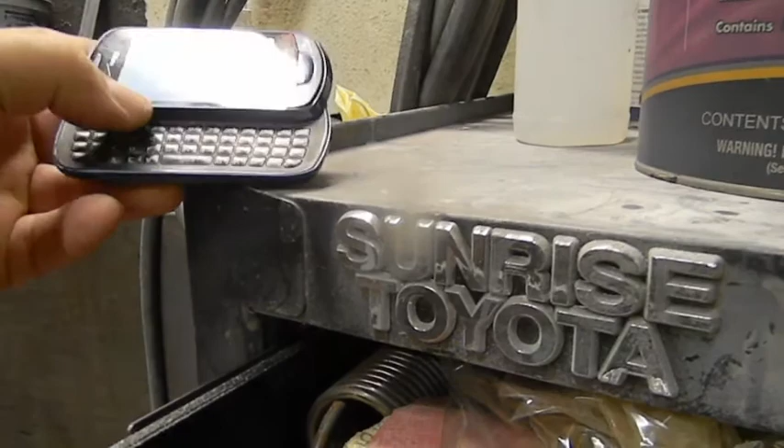4781-2 is what it is. Okay, but I'm reading it through the camera screen, and it's not even focused in.

There you go, now I can read it. 4781-2, basically that's a carburetor number. I got a friend working on a carburetor that he bought used, and it's wreaking all sorts of havoc. 4781 should be an 850.

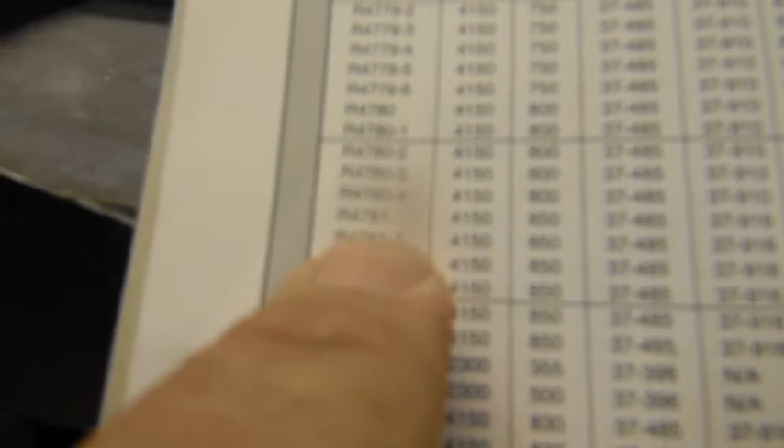Let's see if we can find the number. Did I say 4781? I don't even remember now. 4781, there it is, good. That's a good start, that we have information on it. We're 47. I hope it's focusing. I should have grabbed the other camera, I apologize.

But 4781, 4781-1-2. It's a double pumper. It's an 850.

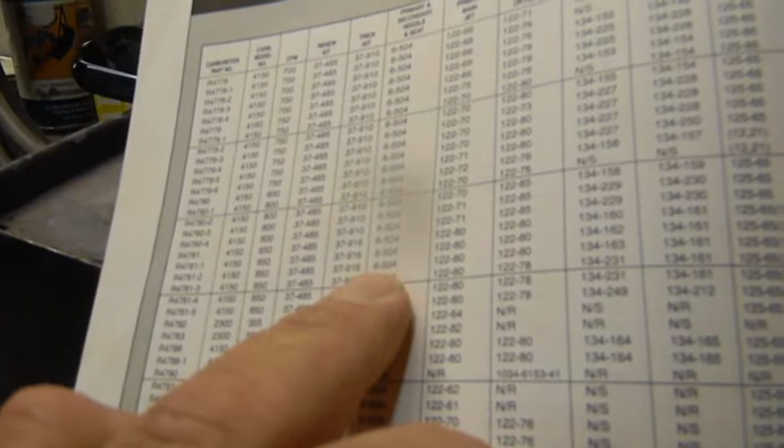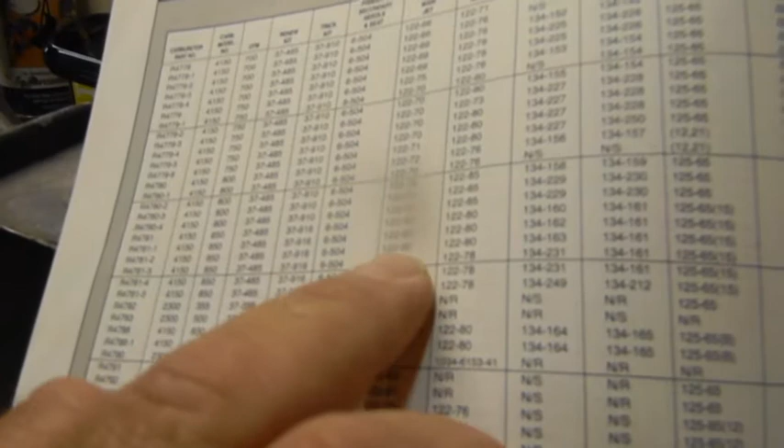Okay, primary needle and seat. There's your trick kit, your renew kit. Primary main jet, it has 80s in the front and 80s in the back. That's where the problem started.

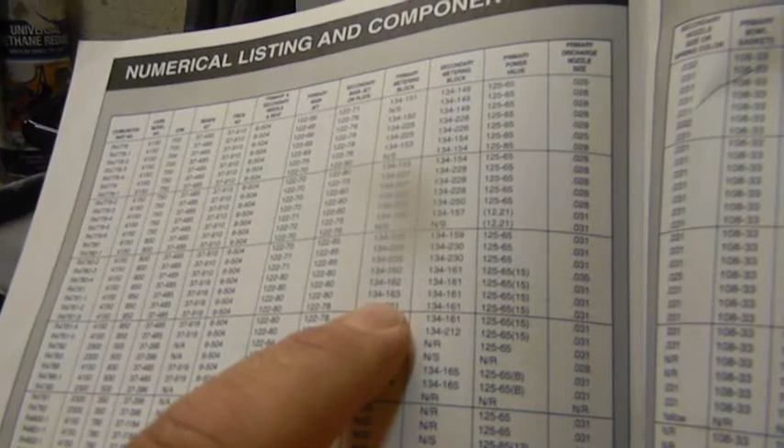Okay, metering block. That I want to confirm. I don't know if these metering blocks, yep, and the discharge nozzles are wrong. Everything's wrong on this carburetor. Holy Christmas.

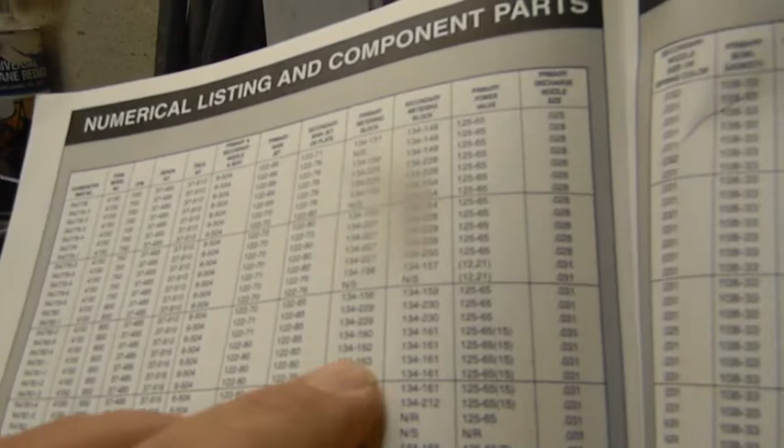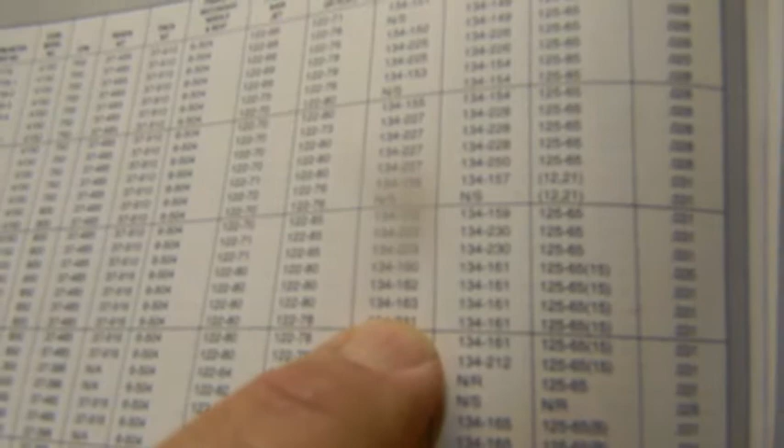Okay, I'll explain in a second, but I gotta write these numbers down. You see the dash 1, 2, and 3. Here's the dash 1. Can you guys read the number? I'm sure you can, I'm trying to keep it out of the blurry spot. Dash 2, dash 3, dash 4 uses the same one.

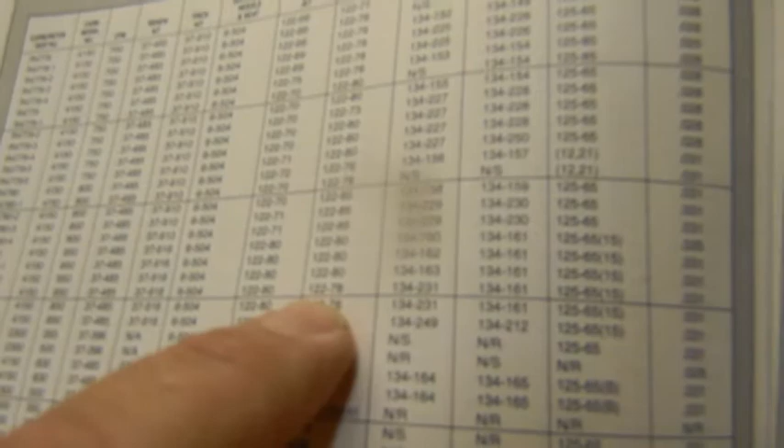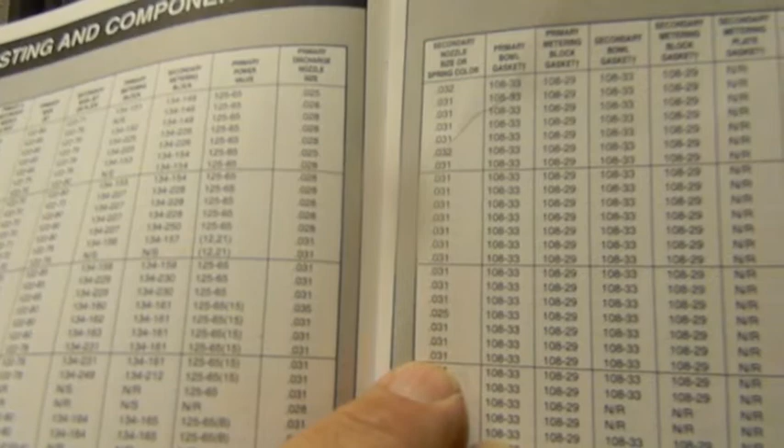Okay, but if you notice, as soon as you get to a dash 3, it's 80s in the front, 78s in the rear. Primary squirter, 31. He's got 28 in there. It's up 2. Okay, gasket.

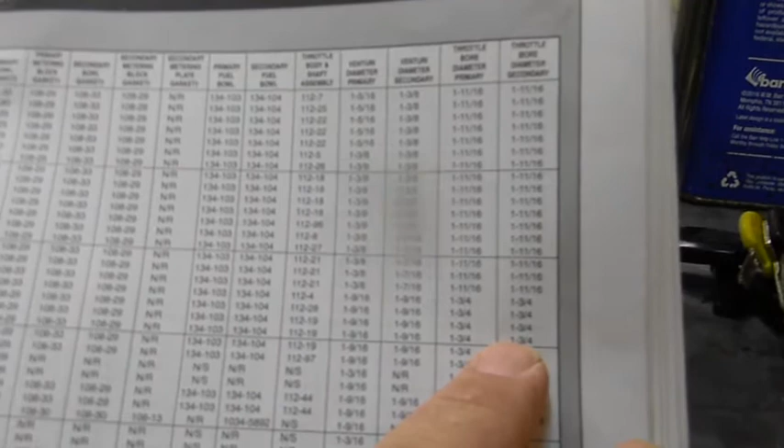Fuel bowl, throttle body and shaft. So it's a 1 9/16, 1 9/16, 1 3/4, 1 3/4. Okay, so now the question is going to be, how much does it flow?

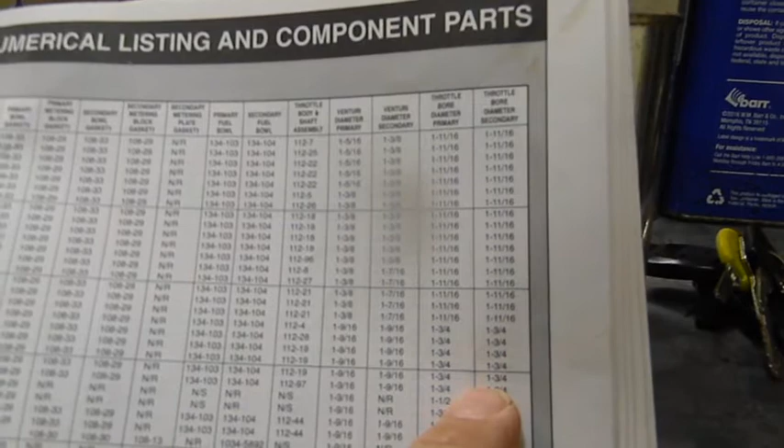Okay, the carburetor I had before was an 850, but it flowed 950. Yeah, we see 800 right above it. It's much smaller, I got a feeling this flows 950. I'm going to have to look that up and confirm.

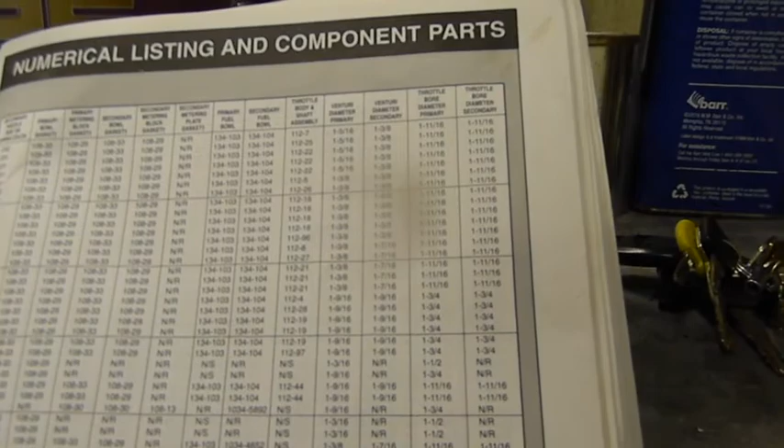But right off the bat, well, let me confirm, see what he's got first, and then we'll talk about this. Maybe we'll all learn something together.

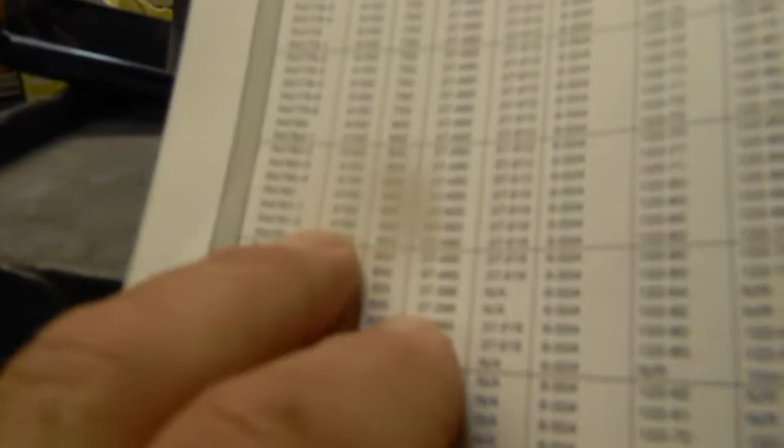Okay, let's go through this real quick. I'll tell you what we got, I'll tell you what some of our problems are. Okay, he has the... what did we say he had? I forgot already. He has the 4781-2, 4150, 850. It's a 950. Okay, flows 950. There's one of the backwards carburetors.

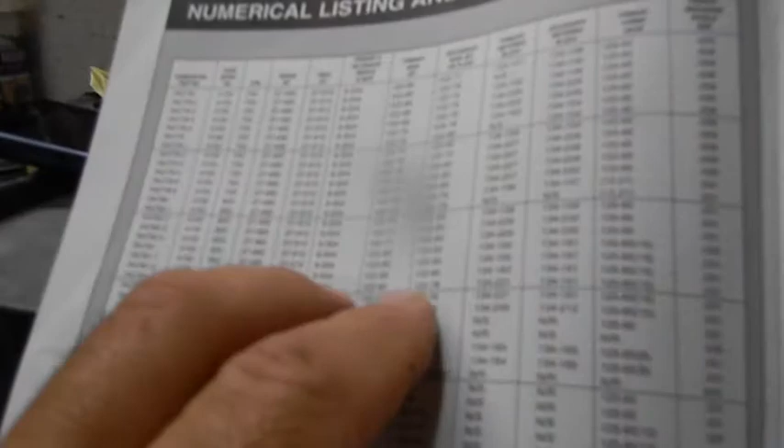Okay, let's get past all this. The primary jets, they're looking for an 80. The secondary jets, they're looking for an 80. He has 81s in the front and 90s in the rear.

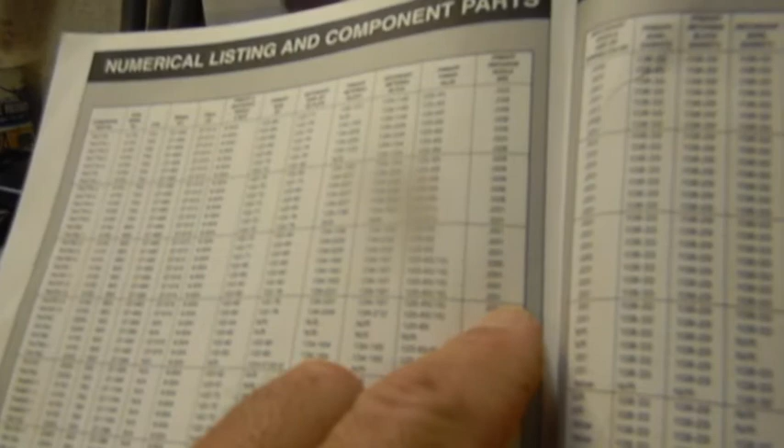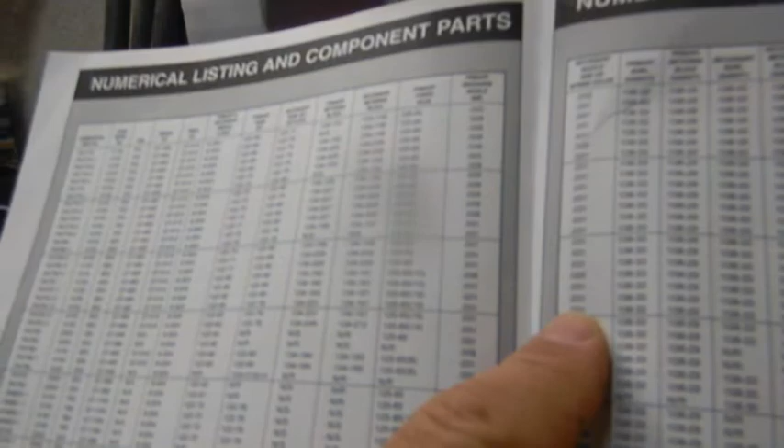Okay, for the primary discharge nozzle, the squirters, they want the 31 thousandths in the front and the 31 thousandths in the back. He's got double 28s. He has a 30cc accelerator pump in the front and a 50 in the back, which is the way I've looked it up.

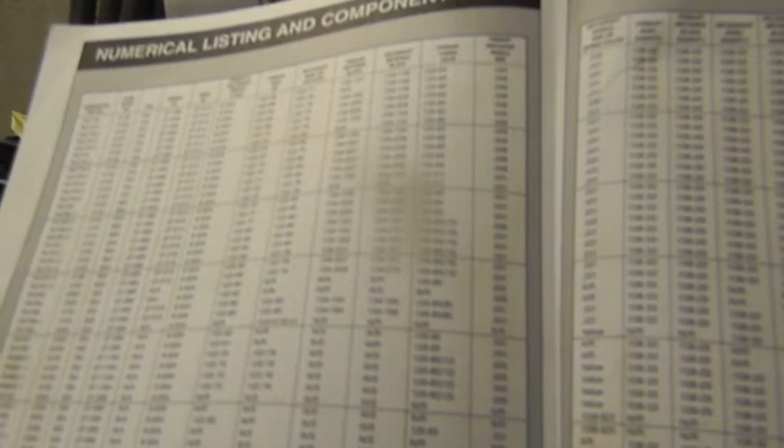It's only a 2-corner idle circuit, which I've also found on these, so there's nothing wrong there.

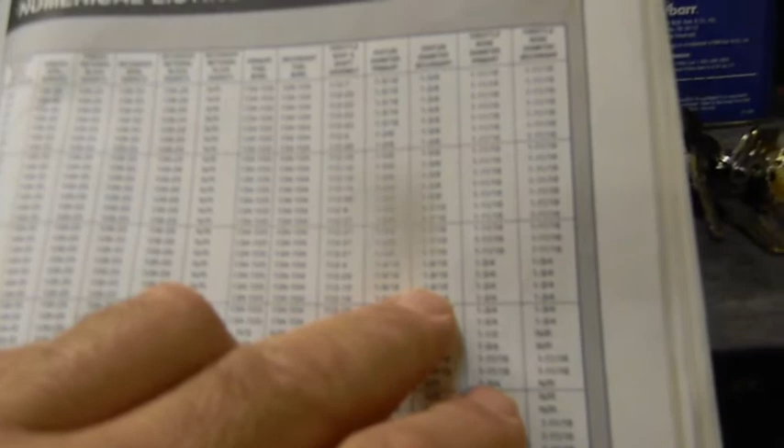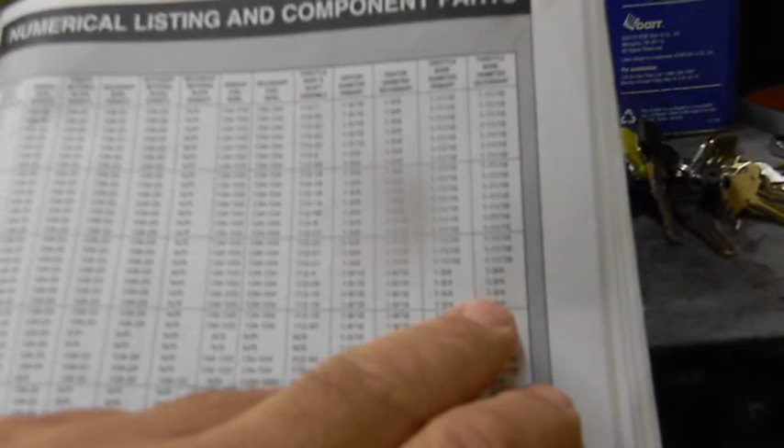1 9/16, 1 9/16, it's like a square carburetor. 1 3/4, 1 3/4. The 950s, these are 1.5, 1.5, 1 11/16, 1 11/16, clearly backwards. That's what people talk about. So the original 850s that you bought flowed 950.

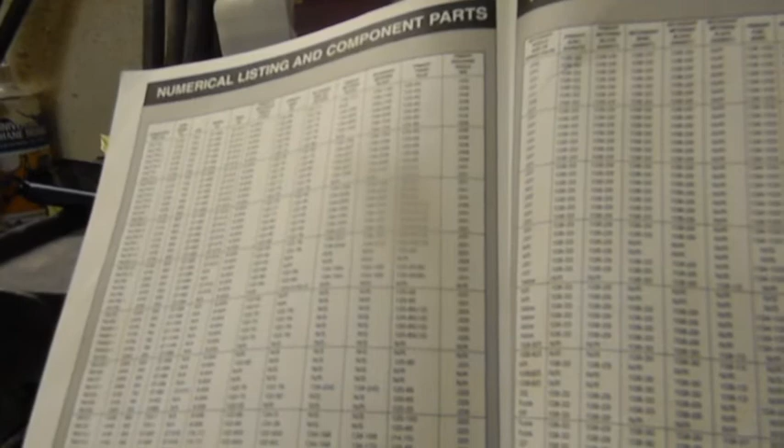The original 950s flowed 850, so it's a 950 CFM carburetor. Now here's the problem, he bought it used. It's definitely an old school carburetor, it's got flathead screws on the bowls.

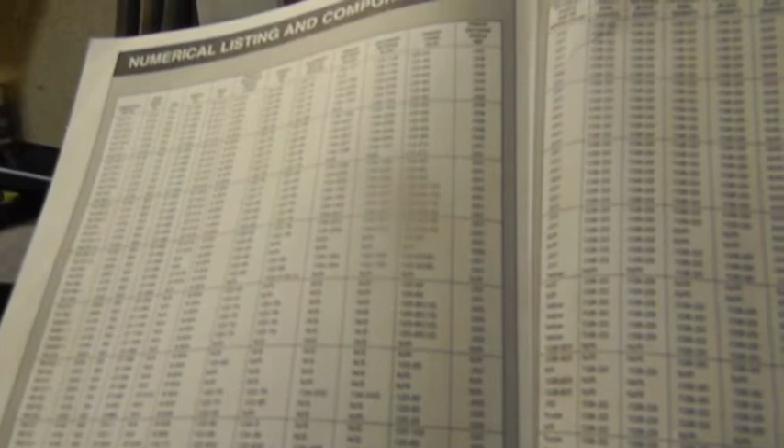Bought it from, I don't know if he knew the guy. I don't think he knew the guy. It didn't sound like it. And it's on a boat. And on a boat, you're not always idle and nailed.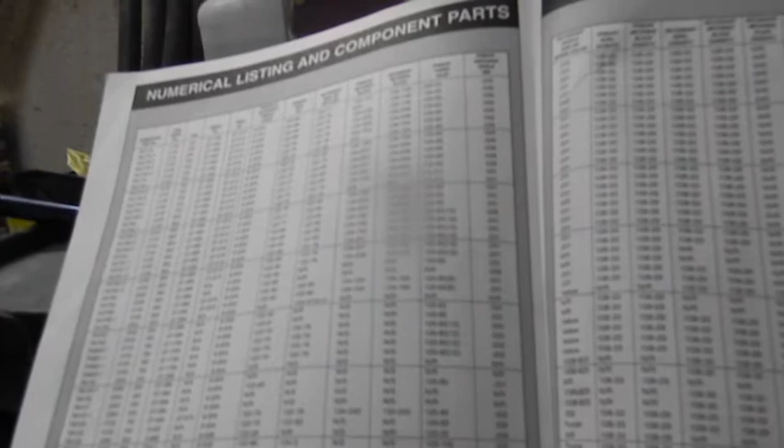So he brought the carburetor in today because he's having drivability problems. Off idle is fine. When you give it a little bit more and the secondary starts to open, it actually bogs down. When you pull back on the throttle, the RPMs increase. When you give it more, you know what I mean? When you ease into it, the RPMs actually go down.

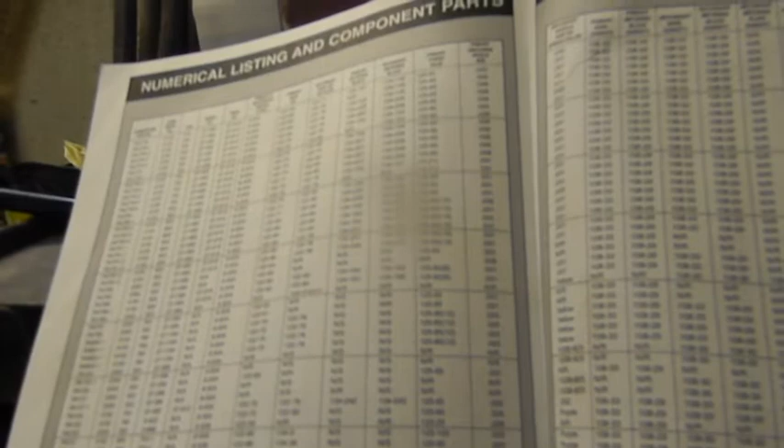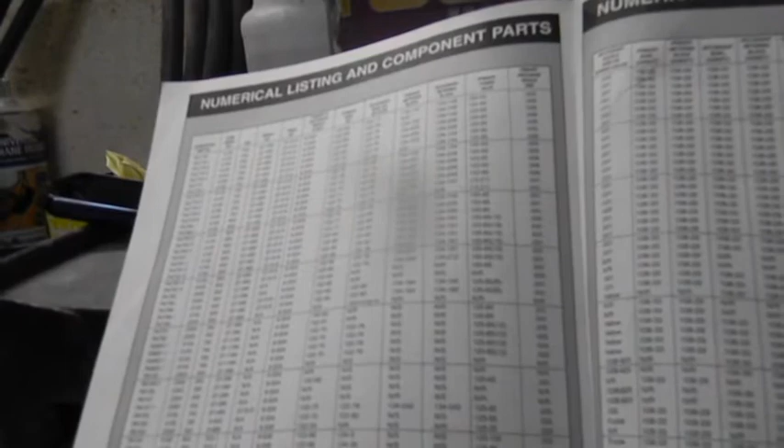Okay, wide open throttle, he's had the thing at, I think at this point, 91 miles an hour. So the boat's a screamer. Okay, it's a big block.

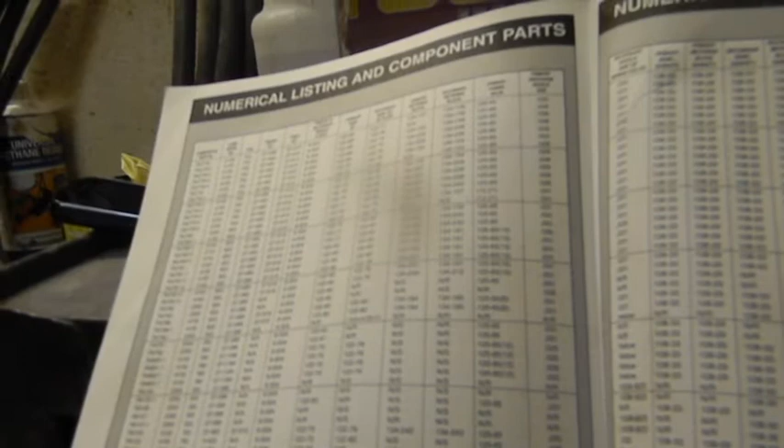But here's the deal, he brought the carburetor in, I popped it open. I didn't know what jet size belonged in there, but I knew they weren't right. I mean, 90s, you can almost stick your finger through a 90.

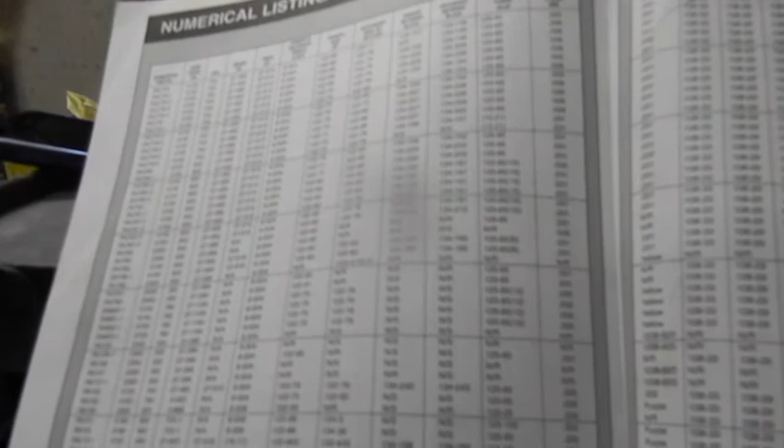But I noticed right away that on the secondary side, they blocked off the power valve. That's why it's 90s instead of 80s, you block off the power valve and you go up between 8 and 10 sizes to compensate. And the primary power valve was a 3.5 instead of a 6.5, which means...

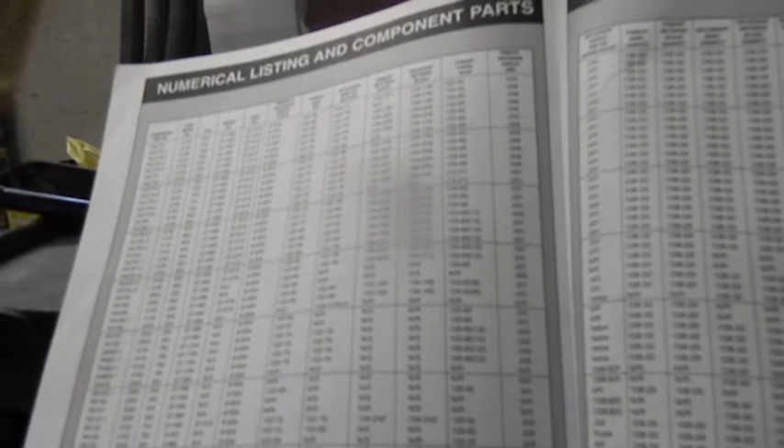Normally when you're accelerating, the engine vacuum goes down, obviously. When you get below 6.5 inches of vacuum in your engine, the power valve starts to open to enrich it. So you're using your main jets and the power valve, and obviously from there down it stays open. When you put a 3.5 in there instead of it coming open at 6.5, you've got to wait more and more and more.

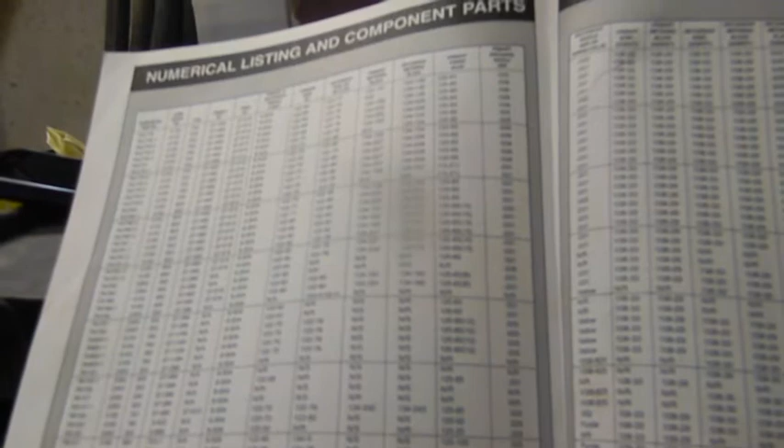Now, some of the things that people did, there are benefits to it, but for his application, it's actually counterproductive, or counteracting what he really needs done. That's for all-out drag racing.

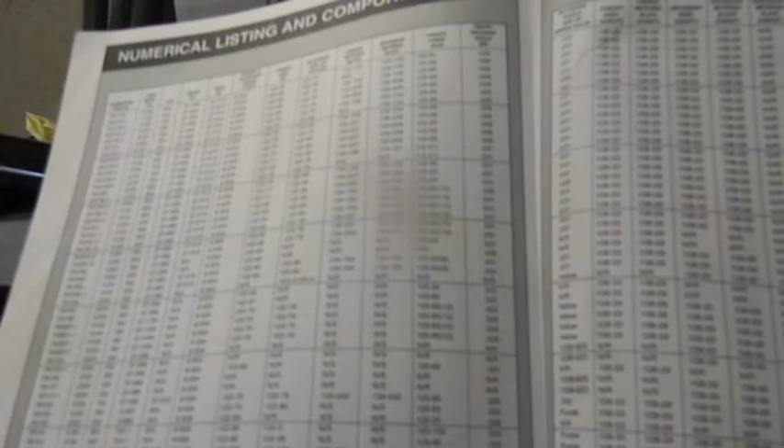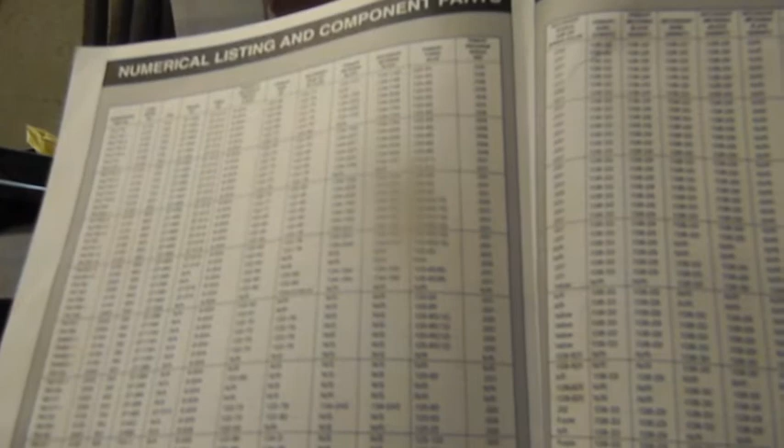By taking out the rear power valve and putting the jets in there, in drag racing, you go from pretty much idle, or you bring it up into a stall, and then you go. And by doing it the way they're doing it, it actually bypasses one of the circuits of the carburetor, and you're just flowing fuel through. But you lose anything in between.

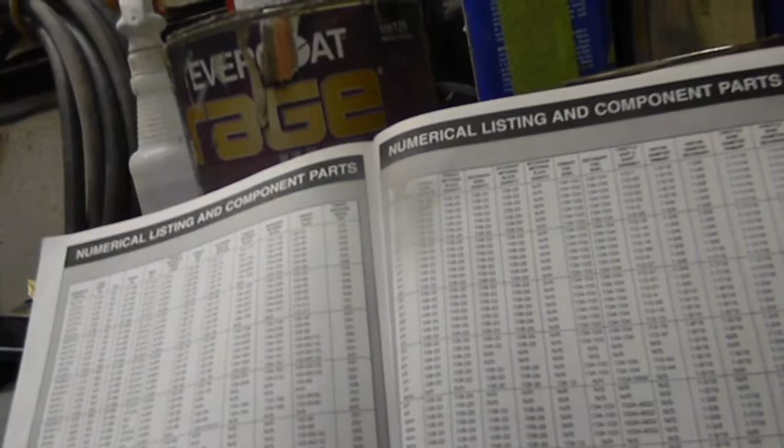Anything in between is too rich. So as you're giving it more gas, and the secondary starts to open, instead of the fuel coming through the jet—a number 80, which isn't 80 thousandths, but a number 80—and then you give it more and more fuel, or more and more load, then all of a sudden it drops below 6.5 and you get the additional.

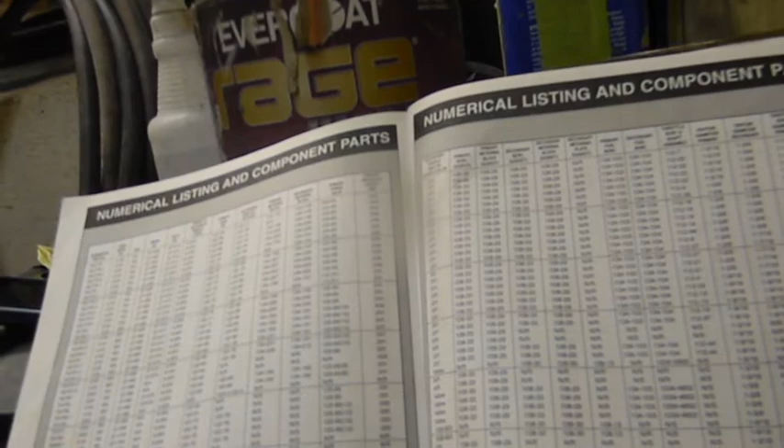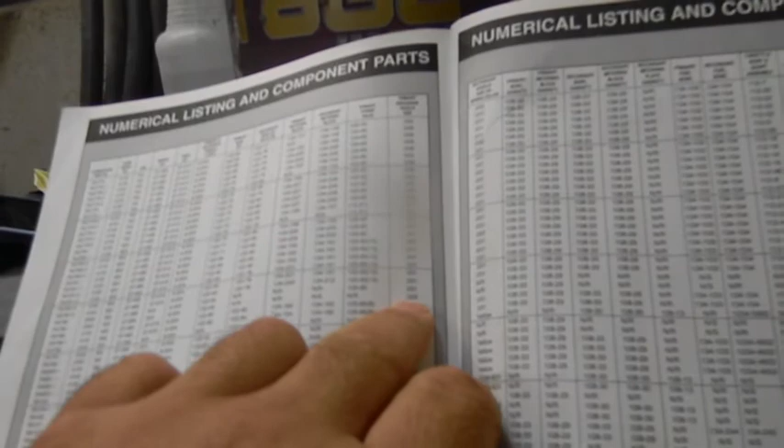As soon as the secondary is open, it's coming through a 90. So it's like, as soon as the secondary is open, it's like having a ruptured power valve and it's wide open. So you're putting too much fuel into the engine. Plus he's fighting some acceleration problems.

I said to him, let's put the carburetor back to the way it came. And he looked up online real quick to see what the jets were supposed to be, which was 80/80, which is what my book confirms.

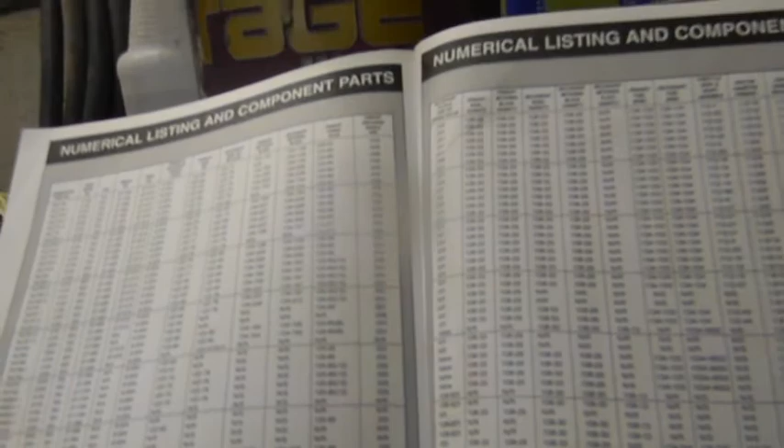But he couldn't find anything on the squirters or any of the other problems, and I didn't know if the metering blocks were changed. Now I have numbers to compare them to.

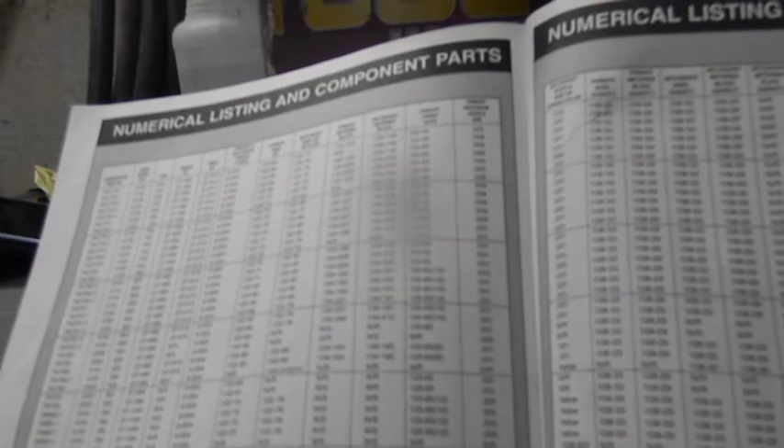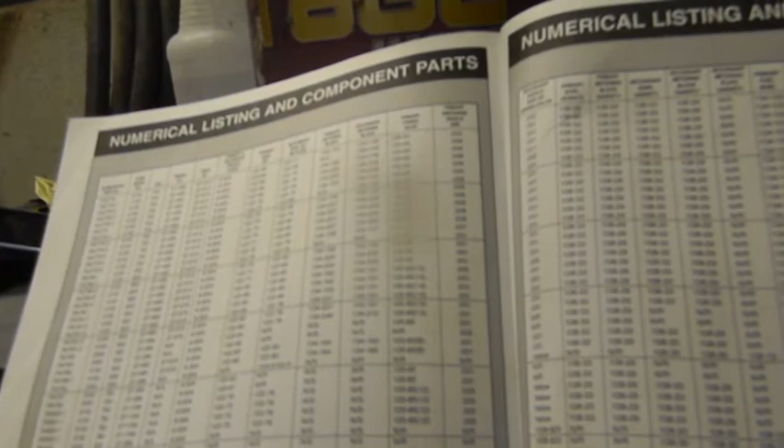So basically what's going to happen is he's going to throw 80s in the front, 80s in the rear, and he's putting two 6.5 power valves in there. And we talked about adjusting the rear blades.

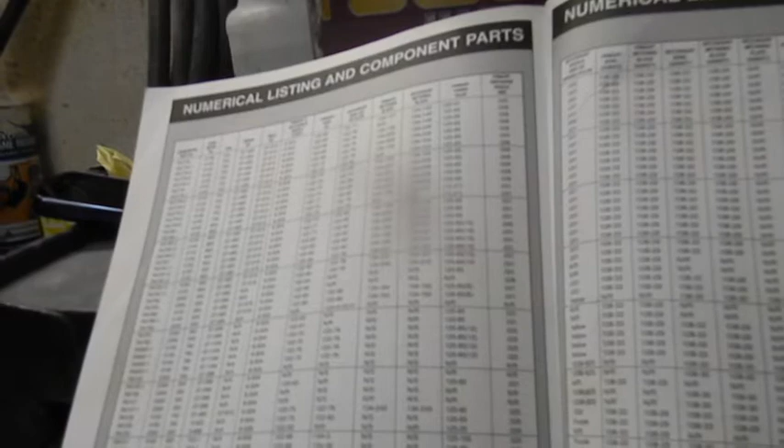Instead of putting everything into the primary circuit—because you've got the primary blade so far open that you're no longer in the idle circuit, you're in a transition slot, so the mixture screws are useless. Obviously the motor isn't stock when you're hitting those type of speeds in a boat.

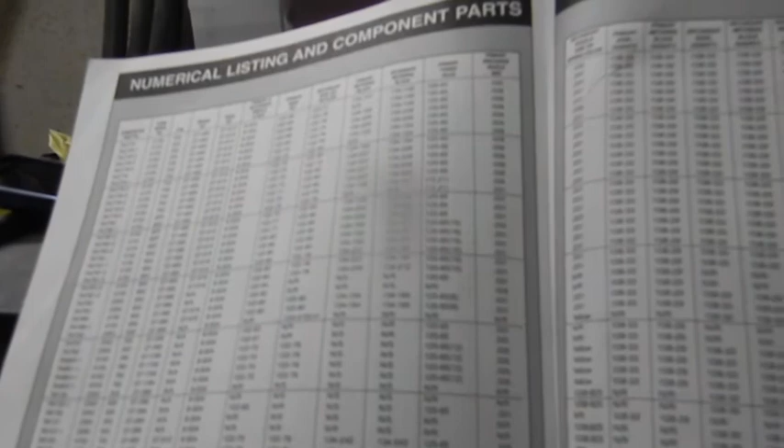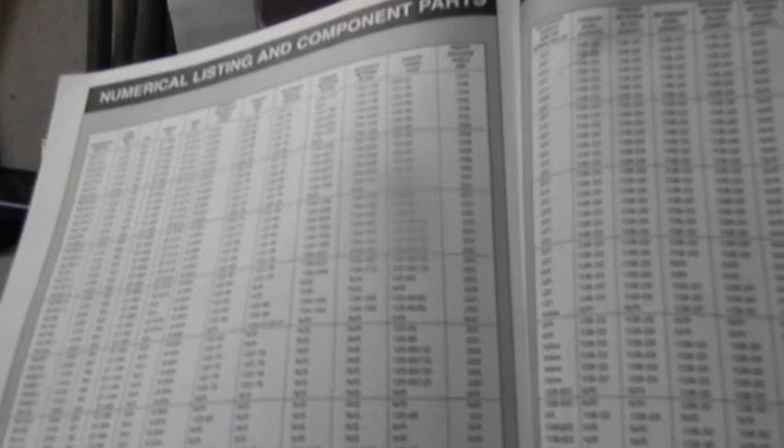So with that said, I'm going to send him a message right now. I don't know if he's out there working on it. I'm going to send them a message right now and give them these numbers, because by doing it that way I won't forget the numbers either. And I'll tell him the information on what he has to pick up.

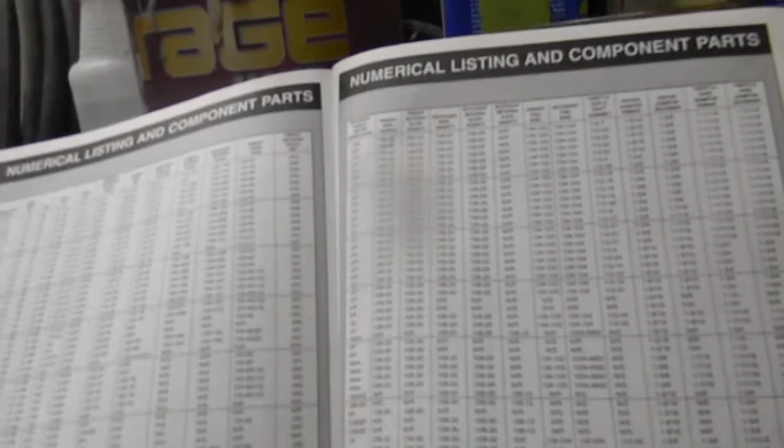And hopefully it's on his way. If any other problems with the carburetor, that just means something's dirty. So I looked at the carburetor. The carburetor was definitely a nice piece. It wasn't like out in the weather.

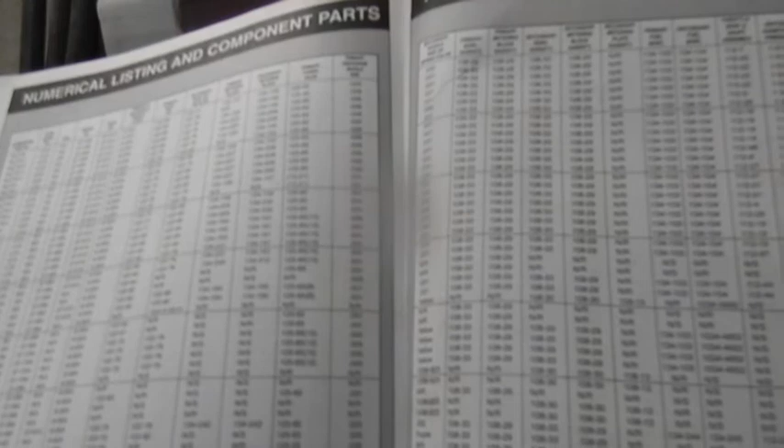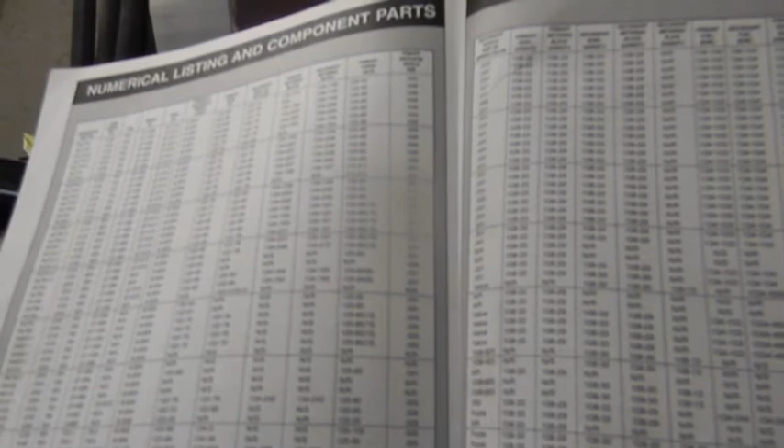Like I said, when in doubt, bring it all back. That's why you never drill or alter anything, and if you do, do it one circuit at a time, one thing at a time, so you can always go back and always remember what you did. And we'll get it going again.

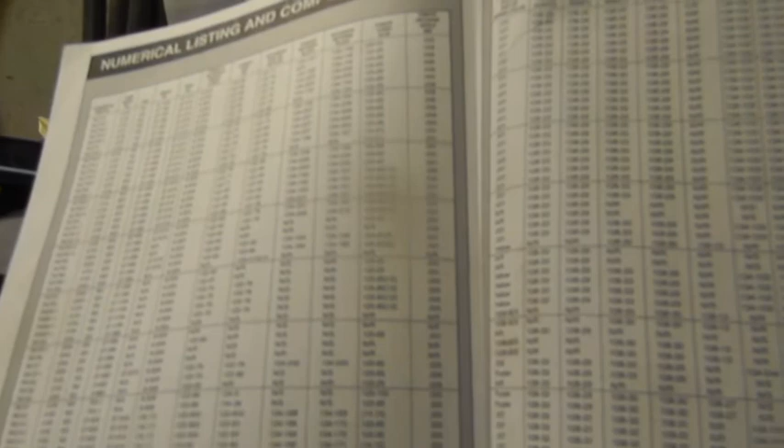Like I said, it's a totally different carburetor than one of the ones I have sitting in the house. But the one I have is still a 950 also, and that one's got a double 50cc accelerator pump. It's a little bit more of a beast.

There are different part numbers if you go down. Like I just looked up an 850 that had 96 jets. But clearly when you open up that carburetor, it's not going to have a power valve in the back. So, depending on what part number you buy is what the application's actually for.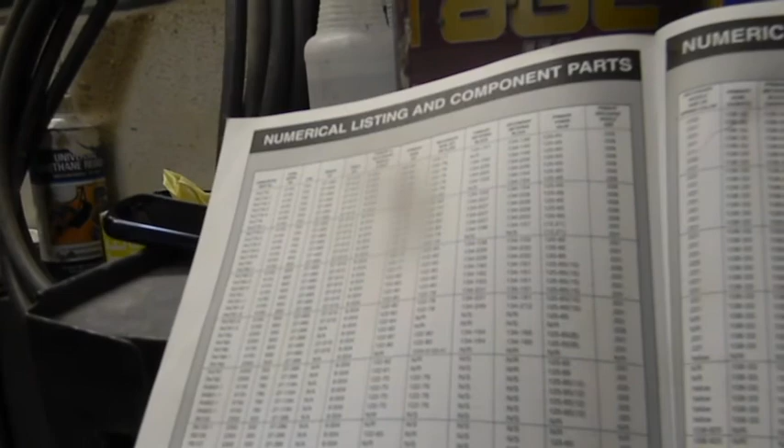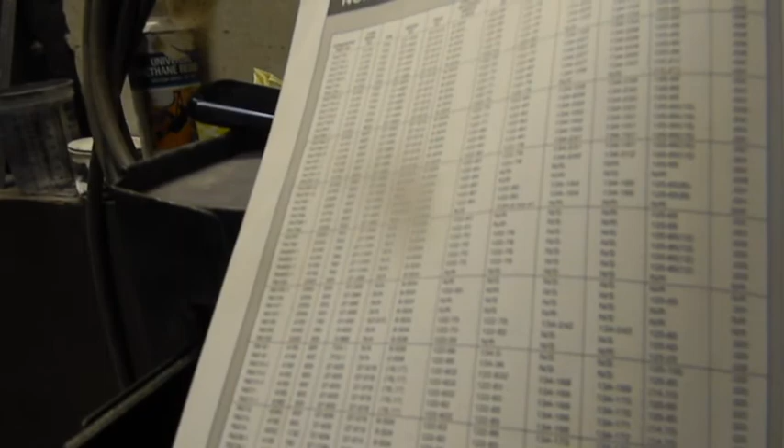People are just used to buying generic, like the 4778, a generic 700, which is just a basic double pumper. It's when you get into more, they have a lot of part numbers you never see in the magazines. That's what all these other ones are, the ones you don't recognize. That's why they list them right off the bat—5 800s right here, and 6 850s, a couple of 830s.

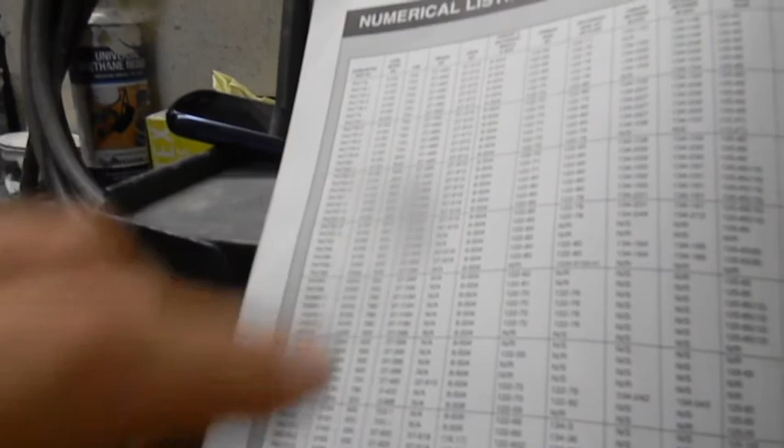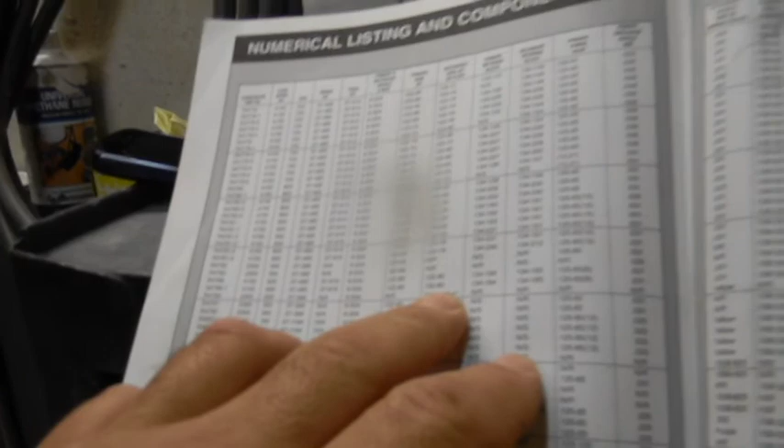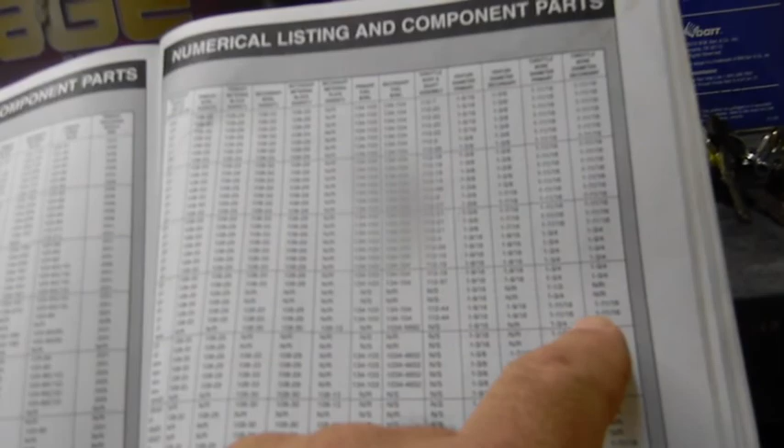The bore size is down to the original 850 size. So a lot of that difference in the 20 CFM could be the booster venturi.

Okay, well that's it. Let me text this stuff and see if we get this beast going.